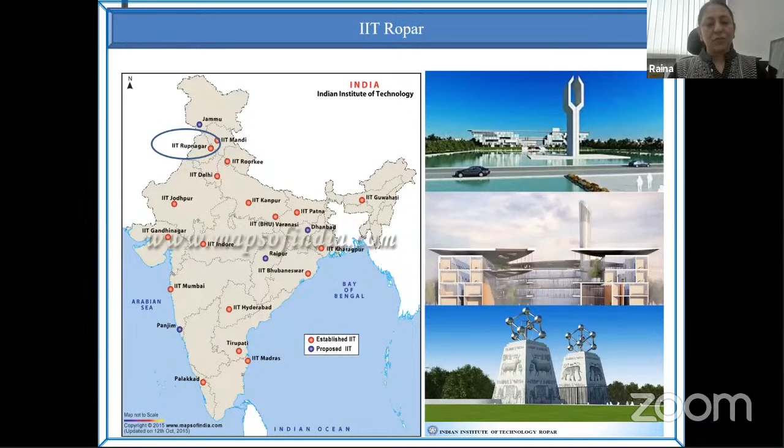Okay, so before moving, just introducing, although you all are from India, you know where IIT Ropar is, but still this is one of the 21 or 22 IITs now. I myself don't count now, but IIT Ropar is well established with all its infrastructure well ready. In fact, whenever after the pandemic you get a chance, it will be wonderful if any of you would like to visit here. This is the department, mechanical department, where presently I'm serving as head, and the entire infrastructure and the labs are wonderfully prepared.

This is just a small glance of my own robotics lab, which I call MOYAR, and this is particularly on modular robotics, and we are trying to inculcate the idea because of the importance of intelligence, right?

We are trying to inculcate the habits of inputting some kind of intelligence in all these types of manipulators. But mainly we work with the modular robots, may it be any field. In particular, I always try to encourage all of us, wherever the platform comes, for Indian robotics, and that is why I had this particular MOU signed long back with Tata Automation Limited, who had started with their Brabo.

In fact, there are more than 10 big firms and many mushrooming firms for robotics in India, and I prefer that all of you should use them in your labs, so that only by uplifting our own companies it will be good. And that is why I also purchased Brabo, rather than only the ABB or KUKA,

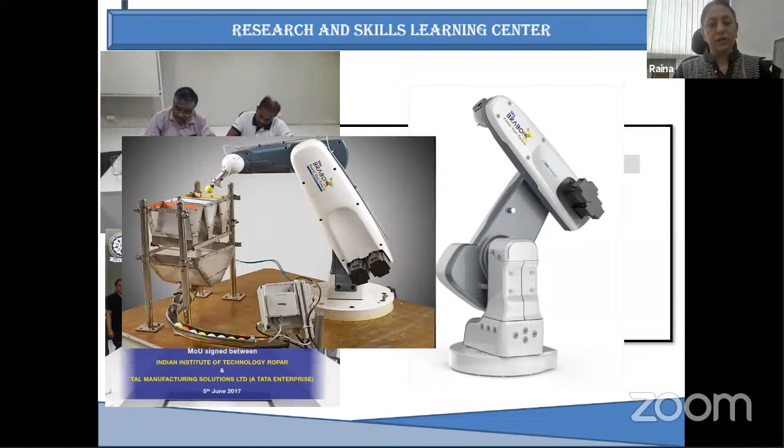where we do not get the opportunity of directly discussing with the manufacturing guys. In Indian robotic industries, it is always better that you can discuss what their problems are, which part they would like to improve. So you can also give some kind of input in the upliftment of Indian robotics. So with Brabo, I had this MOU signed for a teaching skill lab in Ropar. So we are working on it.

And this is just a small introduction regarding my research directions, particularly what I deal with. These are the keywords. Whenever we talk about manipulators, long back people used to say for repetitive work. In the robot definition, one of the terms we use is repetitive tasks. Robotic manipulators are used for repetitive tasks, but these days things are so customized,

when you are working with different platforms, different environments, cluttered workstations. So they're not repetitive, but you will get customized jobs which need not be repeated, which are short term. To improve the flexibility you need to handle non-repetitive tasks. So this is something I work on, and we try to develop these using modular libraries. The rest is just for your information.

Even if I'm working with medical robots or any job with defense, and particularly in industry, which my lecture covers at the end, I always try to see how we can develop a library out of it, how to give it a modular look. So this is how our lab works, and just a few glimpses, small videos, because this is just introducing myself first.

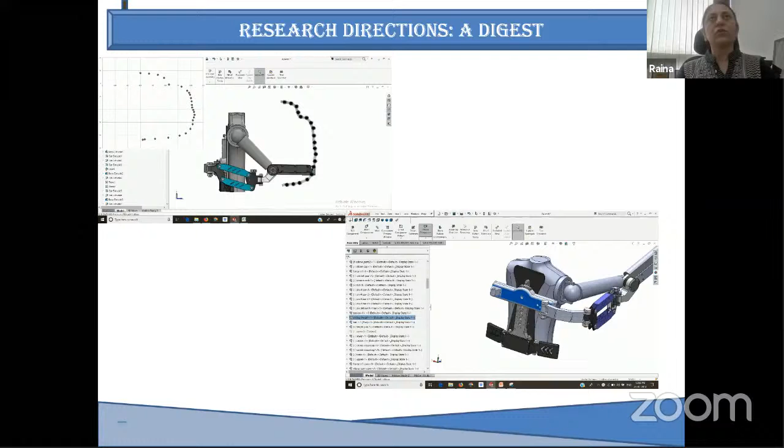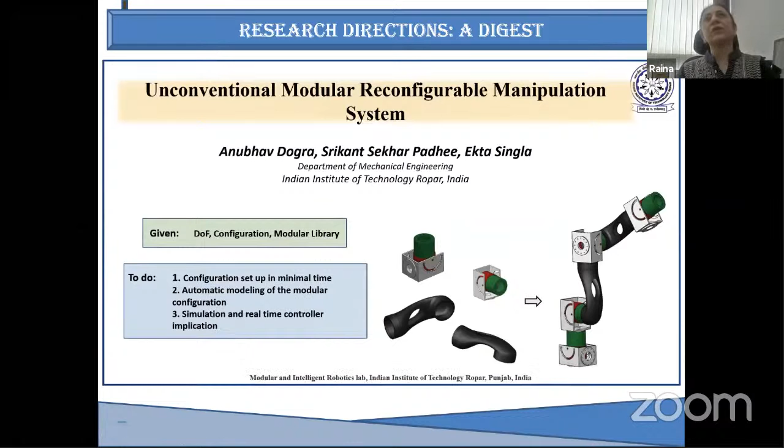So whatever we do, I belong to the optimization design of it, the kinematics of it, kinematic analysis, and particularly up to kinematic design is my job. And then we give it to the dynamics guys. This is just a glimpse, because it is also an introduction to kinematics, and this is my latest work in modular library and how we develop it.

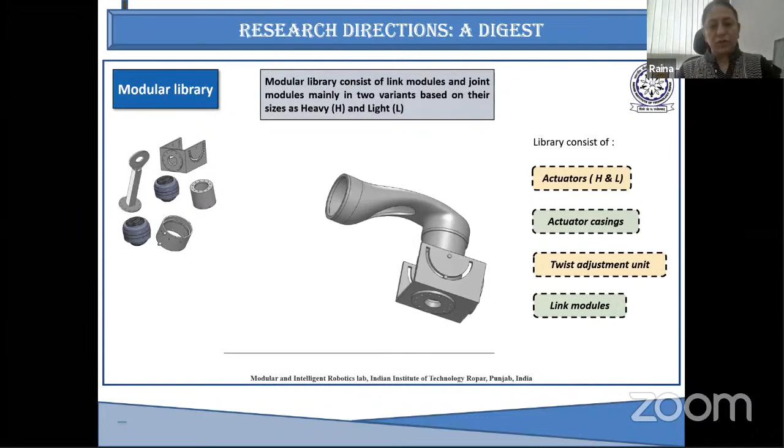And this shows you why we should also learn kinematics, for those who are just starting and for improving their skills. So here you see that whatever robotic arms are available, we need them for customized different tasks. For any given application and given task, which could be small or large, can we have some modules which can be assembled?

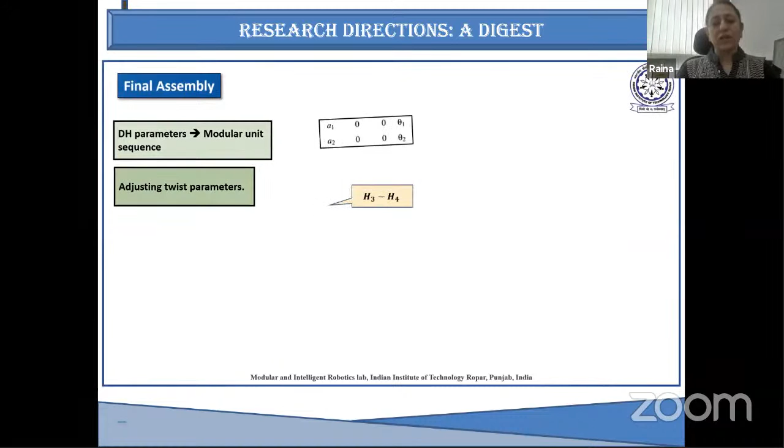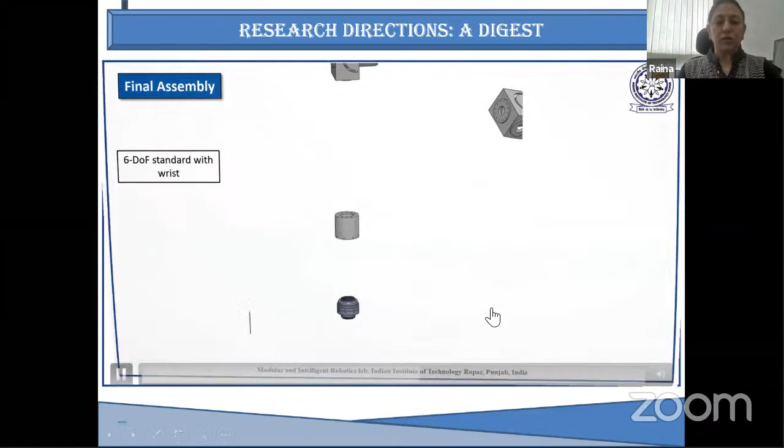So this is our latest work, which has gone into ASME. I thought of at least showing this to you so that you can see how exactly we can work with such modules which can work at different DH parameters. And what DH parameters are, what degrees of freedom are, is exactly what we'll be studying today. Yeah, so this is a kind of manipulation. Of course, it will not be as rigid as our ABBs are. These are just demos.

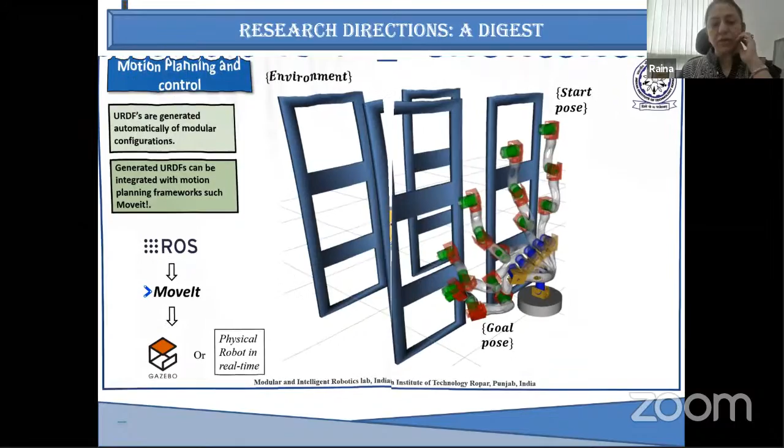But yes, we have done all the static force analysis, and even the dynamic analysis is being done. So this is all prepared. This work is actually in Robot Operating System, ROS. Many of you may know it, or may still not have good hands-on experience, like me. We are using it.

I myself may not have very good hands-on experience, but I encourage the entire lab, my students, to use ROS. So even if you know only the kinematics part, even if you are working only with robot control, whatever your area, may it be mechanical engineering or electronics, it is important that you get introduced to ROS. If you are working with mobile robots, it has a separate platform in ROS. And in case you are working with manipulators, it is separate.

If you are only in motion planning or control, you should use this system. There are further systems also, but you will understand them once you tell yourself that you have to use only ROS from now onwards. Then only you will be more globally ready.

Okay, so introduction, because it was important, as I said, long back. Now these slides will match for a few minutes, kind of 10 minutes, not match exactly. You already got introduced to robotics, and now manipulators only. I'll talk about only robot manipulators, which are mainly the industrial robots, where the links are connected in series, right? And every joint is assumed to be a revolute or a prismatic single degree of freedom joint.

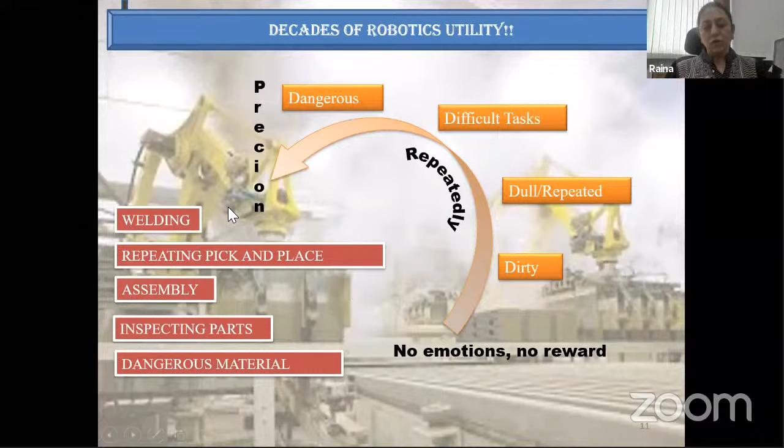Now the point is that you use the same manipulators for different reasons. And what are those reasons? Precision, as I have written, is one. So the entire automotive industry for decades is using robotic manipulators. Even in India, although if you ask globally, relatively we are almost at zero for usage of robots. Although you see them everywhere, if you ask any global person, they may not know anything about Indian robotics.

Yes, for the last half a decade, 1 decade, there was a growth. Half a decade, kind of the last 5 to 6 years, it's emerging very fast. So now we can see huge changes, the way India anyway reacts. Once they understand the importance, it is a revolution. So that is how industries are also speaking about this being a revolution.

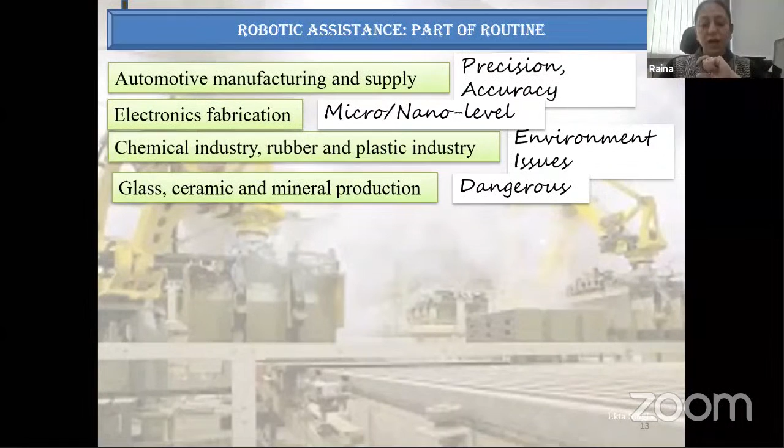So from automotive, although we were using it even earlier, and electronic fabrication, things were coming from large scale to nano scale and micro scale. This is separate. Now there are many other reasons why people are using robotic manipulators, and that is environmental issues and the chemical industry, rubber, plastic. They are very big firms sometimes, but to keep it less dangerous, robotic manipulators are used in all these industries. So why I'm referring to these: if applications are so customized and huge these days, why not learn what exactly is required by the industry if you join them.

And kinematics is extremely important from that perspective, right? Because even if you don't want to design a robot, to run a robot it is important that you know its kinematics. And this is even important because of unconventional designs, as I'm writing for the wood and furniture industry. There was a time when wood and furniture were not using robots. Food had started, for hygienic purposes, etc., and now is the time for wood and furniture.

You can see many YouTube videos of unconventional wooden designs which are prepared using robots. So even if you are using a particular robot given by ABB or KUKA, 6 degrees of freedom or 4 degrees of freedom, without knowing its kinematics you will not be able to work on it. You can work for some time by just playing on its keyboard, but you cannot actually get into the design work, like what particular aesthetics you want on the furniture. You cannot work on any specific application unless you know its kinematics. So that is why I would say it is important.

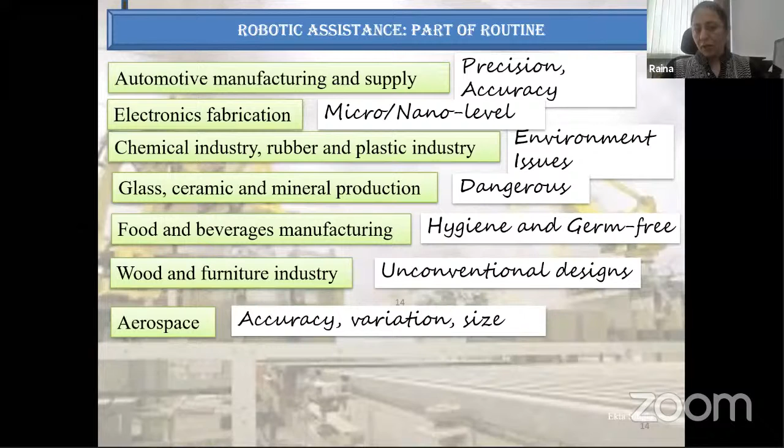And what other applications? Now, I would like to show you a slide where we have major applications which you see in use today for these robots.

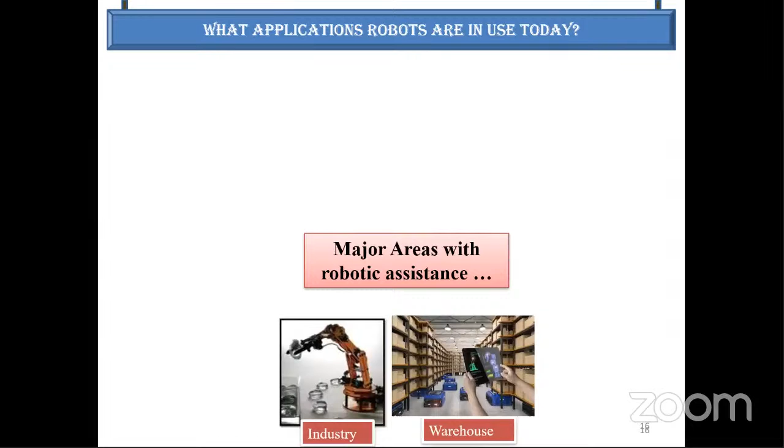Am I audible? Yes, ma'am, you are audible.

So these are kind of mobile robots, but I'll talk about the mobile manipulator, because in all these things, for example, this one in defense, on the left side above, I've shown a picture of a manipulator which is attached to a mobile base, right? So this is also important. You can always consider the mobile system separate. You can do its motion planning separately, and you can do the motion planning of the manipulator, the serial manipulator, separately.

So why I've shown you all these applications, there is a reason, because may it be in service, may it be in agriculture, or even at the right side below, you will see that we have building work being done using assistive devices which have as their major part a manipulator, a serial manipulator. And even in medical, you know that Da Vinci, one of the surgical systems, is imported, right? We have not yet developed in India any system which is already in use for surgery. But yes, there are many at the final stage. As far as the reference is concerned, you might have seen in larger institutes like this, even PGI or Medanta at Delhi, they do have these robotic manipulators.

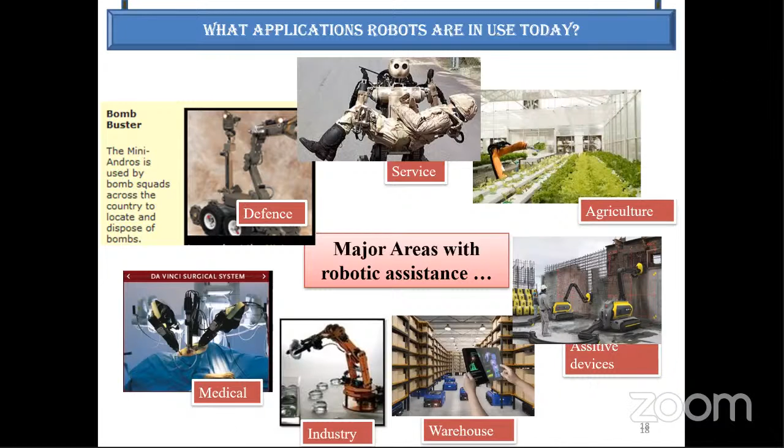Now if we talk about this manipulator at the left side, whose base is not fixed, in the assistive devices of this building or in defense, these examples show as if the base is also moving. Yes, it can be, but then we say it is not a manipulator, we call it a mobile manipulator, because it has a mobile base which you can study as a mobile robot. And for the manipulator, you can always consider its base to be fixed as the reference on that particular mobile platform, and then work on the rest of the degrees of freedom. So how to do all these things, what does that mean? This is what we'll be discussing today.

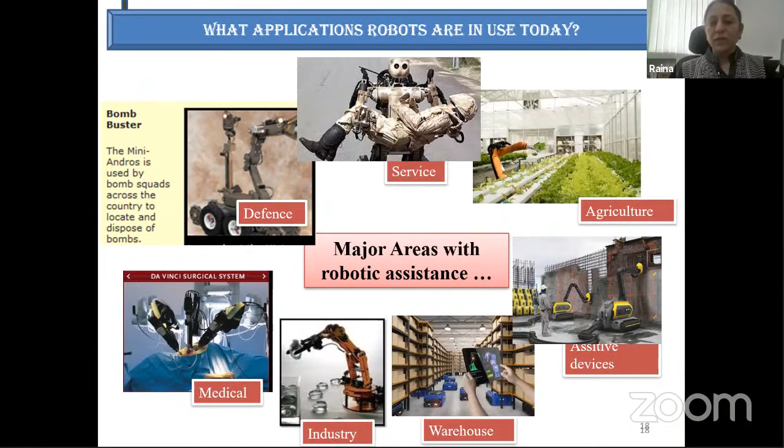Okay, so basically, this was the introduction to robotic manipulators. If we are talking about kinematics, there are a few terms, aspects and features of robotic specifications which come into our discussion. So I took a few examples of very advanced recent robotic manipulators which are in use for different applications. Normally in these courses not everybody is from the same field. People are from mechanical, electronics, computer science, and some are teachers at the beginner stage of their teaching. Because of such an audience, I prefer to share this. The first important specification whenever we deal with any robotic arm is degrees of freedom.

So we will write the kinematics. What is kinematics? I'm coming to that later. And these are the important specifications. Now, what are those? For any given robotic arm, this is now a manipulator, and I'll talk about manipulators in this particular hour. So how many degrees of freedom, and what does it mean? It is the minimum number of independent parameters which can define the motion or configuration of a particular robotic manipulator. So you need some minimum number of independent parameters; as this robot starts moving, these parameters define at what configuration or posture it is at present.

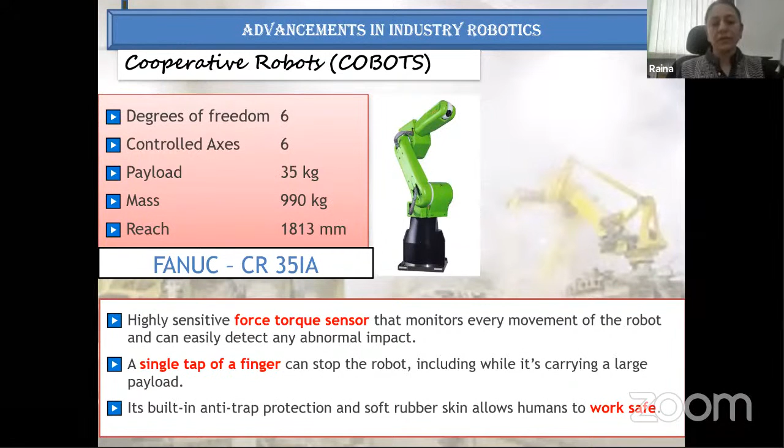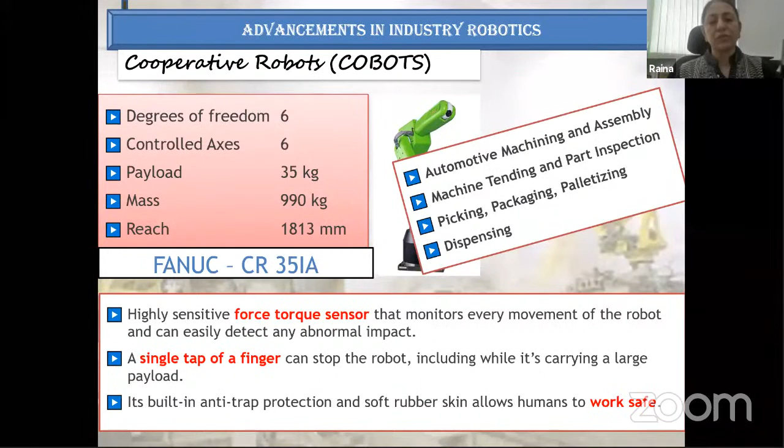be enough. But I would say that before talking about which actuator will be used, we have to think about the size according to the requirement, and size comes from the kinematics, because what length, what angle, what size of a particular manipulator, even the width, all comes from kinematics. So next, I'm not getting into the applications of such small size; I'm just writing them for you to read later.

Third application, this is a mobile manipulator, right? If you check this part, if I take it separately, right? Then for the upper manipulator, it is mentioned as 5 degrees of freedom, and you can see one, second, third, fourth, and five. So it is talking about the 5 degrees of freedom of the manipulator. The 2 extra degrees are for moving; even if it has only one actuator, it can go in the plane, so it can take turns, right? It will be maximum 2 for working in this plane. So that will be added.

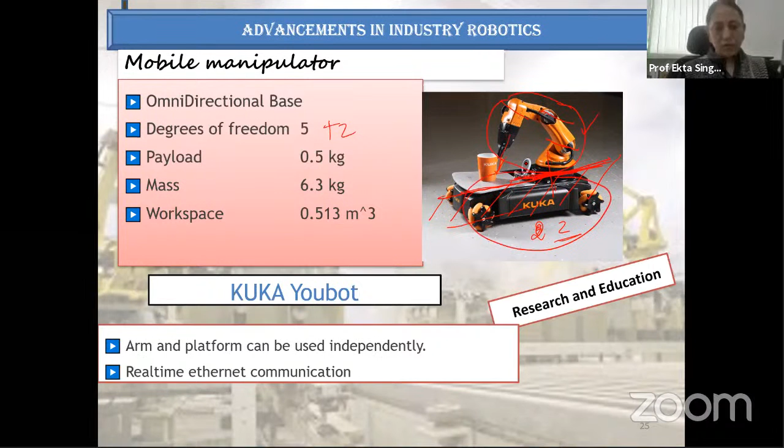But only for the manipulator, when you study how to write the kinematics of a manipulator and I give you this particular robot, you can always take this section out, work on the manipulator separately, and work on the mobile base separately, right? Whatever is the requirement, accordingly we can work. This is all just to introduce you to some of the recently coming configurations, so that you get connected to what is getting used in recent industry robots.

This one is only for paint, right? If it is only for paint, that means only what position it is in. Why I'm showing it is it's high performance, but what is the performance? The dynamics, like which velocity, can I reach here, what torques are required, and then how to control it to maintain that speed. This is coming to dynamics and control. But as far as kinematics is concerned, if you want to paint, and this is your present configuration, next is say this, right? After some time, say it is this.

Then after some time you want it to be something different, right? So where you have picked up this gripper or the tool which will be used for that industrial application, how it is connected to the base, how to show that equation, the relation between this end effector xyz orientation and this frame which is attached somewhere at the base, right?

How to connect all these things, because we have so many degrees of freedom, plus the importance of the degrees of freedom will boil down to a particular equation which we will call the kinematic model. We are coming to that. But this is all to show you that different manipulators have in common the same configuration. Everything is having a serial link, a joint, a link and a joint.

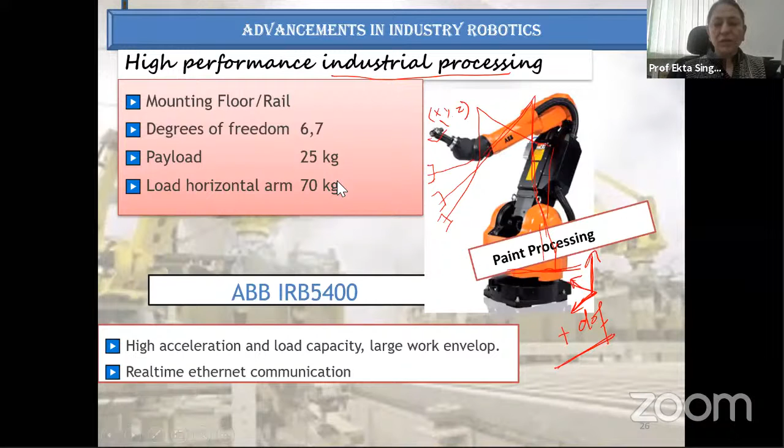So although its payload capacity is 25 kg, here you will find that with almost similar kg, its own weight is not mentioned, but I think next it is mentioned. Anyway, I'll just show you this quick picture, which is also a collection, because I like this video. Of course, it is from ABB, and it is talking about...

I don't know if you are getting the voice. Well, it is not so important. Yes, come.

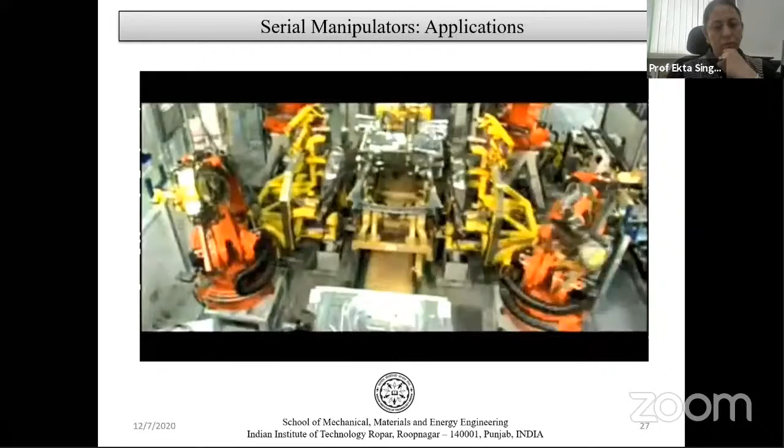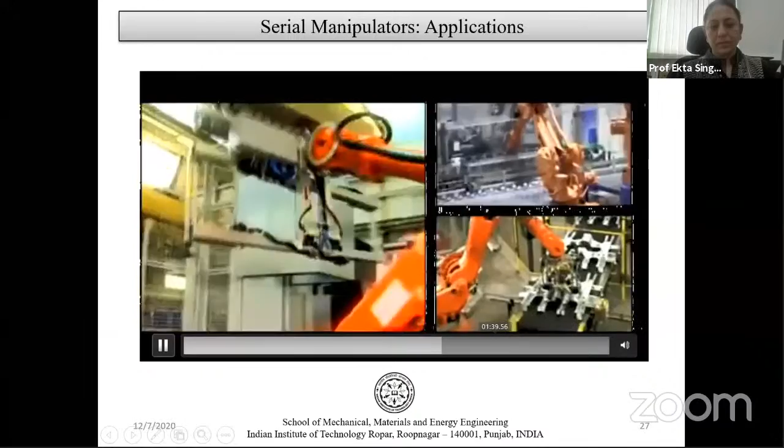Okay, so basically why I showed you this is, this was all about the introduction, not only to robotic manipulators, but also to the importance of robotics and to the introduction of kinematics. This last video was added to tell you that it's the same manipulator, one which is serial in nature, right? Say it has 6 degrees of freedom, and you will see that the skilled workers, once they know how to use it, will start using it.

But unless they know the kinematics, because not everybody can actually study it. But engineers help them whenever you need to plan them again for a new application; you need to know what its degrees of freedom are. Till the last decade, people have taken robotic things for their help in their industry, but they have no clue of the models at the back, and this is why they're always dependent upon the firms, even to plan whenever they are working on a new application.

So do you think this is applicable? If you are working with customized robots, the flexibility is too high, you're changing the application every fifth week, then how can you be relying upon the firm to plan for you? So more and more engineers are being hired these days. Even in India, robotic firms have increased, and even if it is not the development, the employment is getting high. So people should study robotics.

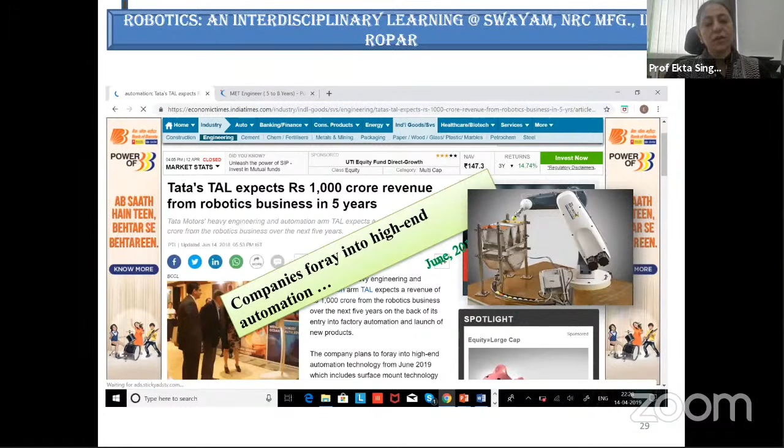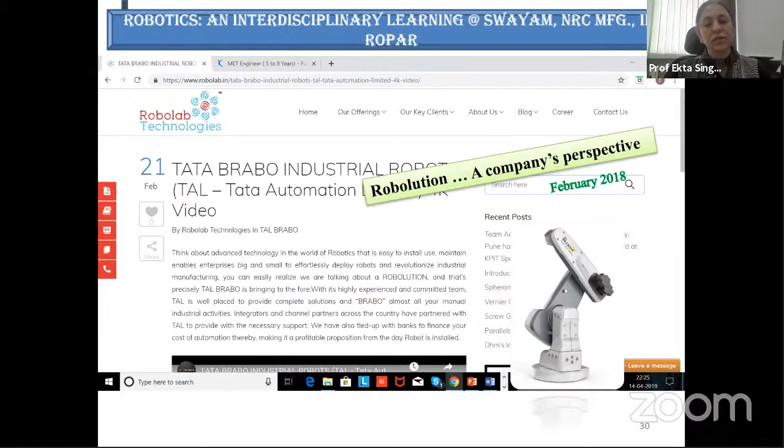I am not here to just talk about this agency, but similarly, as I said, these are just a few news, and they are not only for autonomous vehicles. They started this company as an enthusiast who wanted to work in robotics, but this firm is really big. You can see how the bigger firms are coming up. Upcoming businesses are too large, and this is why your learning in robotics courses is extremely important for your knowledge and for you to tell your students about it.

As far as humanoid robots, I'm talking about the boom of robotic startups, because these days there is a boom, mushrooming companies, but you never know which company will really come out big or small, but everybody will contribute, this I'm sure. For the time being, those who would like to get into robotics in a proper way and sustain themselves for a few years, that will really be good. I would say from both perspectives, the Indian robotics industry in total and for the firm itself.

Okay, so this was all about the importance. Now let us come to the fundamentals and the techniques, because what are robotics? Before getting into robot kinematics, these are a few terms which we normally use, and they come from, I'm not sure if all sitting here with me are mechanical engineers.

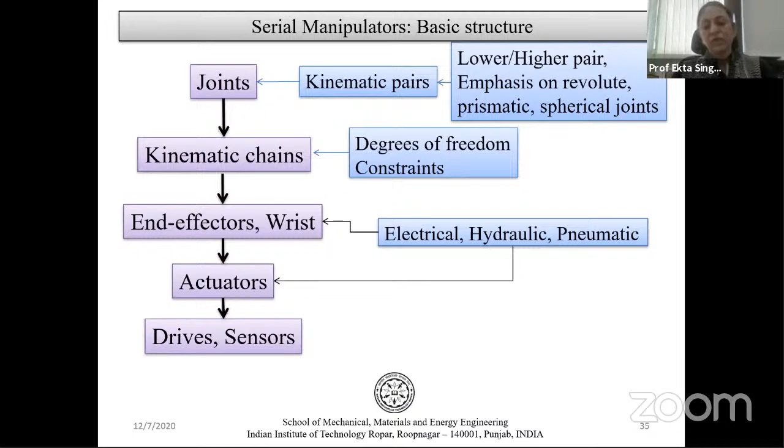And end effectors, I've already spoken about this. This is actually the tool or any gripper or the particular component which is attached at the end of the serial linkage of the kinematic chain, which will be used for the particular application. So this is what you would call an end effector. And then of course it will be using some actuators and drives, that is separate. These are just for introducing some of the terms.

And yes, now from here, I would like to use a little bit of pen writing also, because it's important that we talk about linkage. We said, okay, I'll just fold.

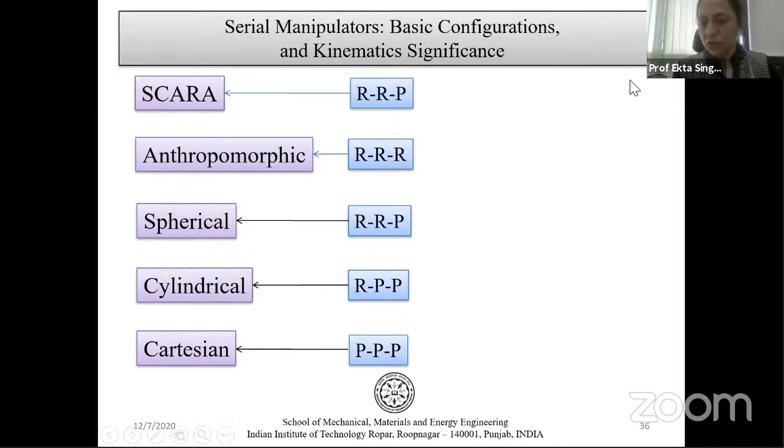So we were talking about a particular linkage. This is the base. Now, whatever I have introduced till now, I am using it: fixed base, a link, a joint, another link, another joint - and this joint, to show you, is a revolute joint. This is another revolute joint. Now I show you a joint which is prismatic, which means to and fro, like your piston - this is like the hinges. And then after that, we have nothing but a gripper, or the end effector.

Now, even if this is not a plane, it can be shown that this is planar. But the moment I change its shape, the first is fixed, but it can rotate like this, its axis is this. And here the axis was this, and this was fixed.

This was fixed, and this is the Z. So there's a difference now, but this is also similar. This is rotating, and after that we have something that has just taken a shape like this. This entire link is rotating about this Z. After that you have another link which can rotate like this, and this particular one is P, so this is also R and P.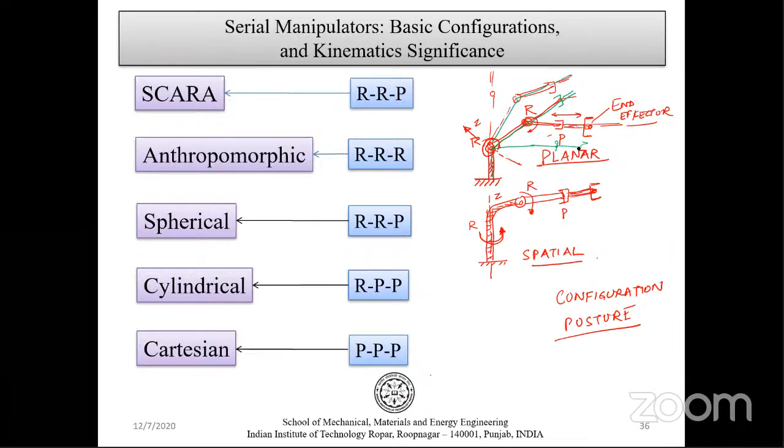So we are talking about configuration as one word, and posture as another. Whenever we are talking about posture, I'm talking about these different postures. Like this is one posture, second is in which I have changed it. Then this is another posture, or it can come here like this. Similarly, this will change, it will go at the back. It can go even at the side because it is rotatable.

It can come at this side and the rest part can remain. This is just the same linkage and this is one gripper. So these are different postures, but as far as this one and second, these are called configurations. That means these are basic configurations.

To introduce that, coming from the basic terms, even if something has 3 degrees of freedom, both had 3 degrees of freedom. It has, even this had 2 revolute and one prismatic joint. Even this had 2 revolute and one prismatic joint, but both are 3 degrees of freedom, both have their configurations separate. And these configurations, some of them are very well known, called standards, which one should study in the beginning.

I used those only, and simultaneously at the right side using our writing I will tell you all the fundamentals. So here the takeaway is this: what is configuration and the postures, which means when you are changing any degree, you get a new posture, because the degrees of freedom help us to define the position

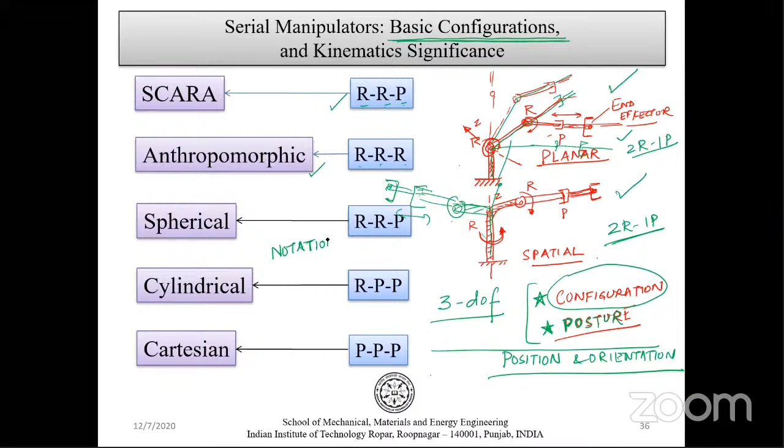But in a particular plane, if you are working for an arm, you can say it has RRR, like all three revolute joints, one at your wrist, one at your elbow, and one at your shoulder. So you can say it is like an anthropomorphic configuration, spherical. Rather than speaking it here, this was just to show you how to denote, how the notations are being used.

So basically next, this is one example. From here, configurations are being shown to you, but simultaneously we will take care of some kinematics importance. Now what can it do: up and down, left, right, in, out. There are 3 degrees of freedom.

Okay, 3 degrees of freedom. Specifications should be very sure about what we are doing for its kinematics. What are the types of joints, which means PPP. Now these are all prismatic joints, and this is the gripper. Now what is kinematics, I'll introduce it here. So if you tell me, taking any example, what do we mean by kinematic model?

Why should I study it? We need to study it because we would like to have a relation between the end effector, which is this, in this case position and orientation, and the base or a reference frame, with respect to reference. You can simply write that. That means something here.

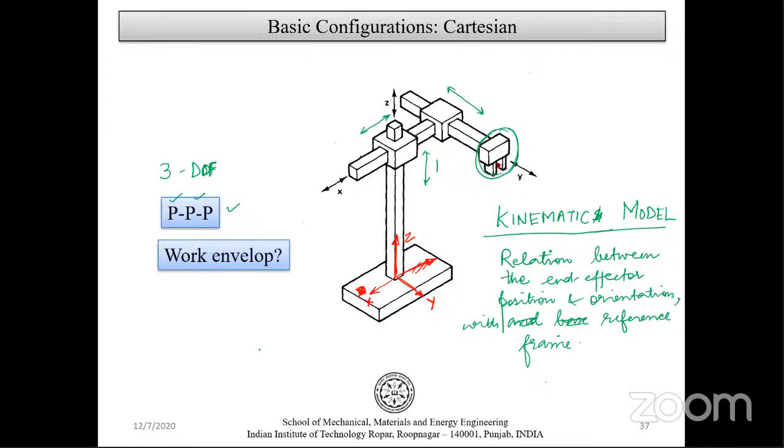You need a reference point even at the gripper. Now, how to tell what is the position vector of this particular point? After some time, if you say this is my first degree of freedom, this is second, and this is third. D1, D2 is the movement here, and D3 is the movement here. So I'll denote the prismatic movements as D and revolute, whenever there is a rotation, as theta.

So if it is so, that means we have here D1 as a parameter, D2 is another parameter, and D3, which are variables, and if they are changing, the configuration or the posture will change, right? So this is to connect whatever we have done till now.

So if it is so, you understand that if I change the posture, even if only D1 changes, or D2 or D3, this point which is mentioned here, I call it as P, the last point for the end effector, right? If it is so, then the position will be defined based upon D1, D2 and D3.

That is all right. Now, even to show this, because the orientation cannot change unless you rotate it, right? But this orientation is fixed in this case. And normally in the 3 degrees of freedom manipulators, they are used for positioning. The configurations are different, but normally they are used for positioning.

But in totality, the relation of this end effector position or even orientation, if it is available with the reference frame, how to connect this, how to join this. Now, in this case, it is very simple.

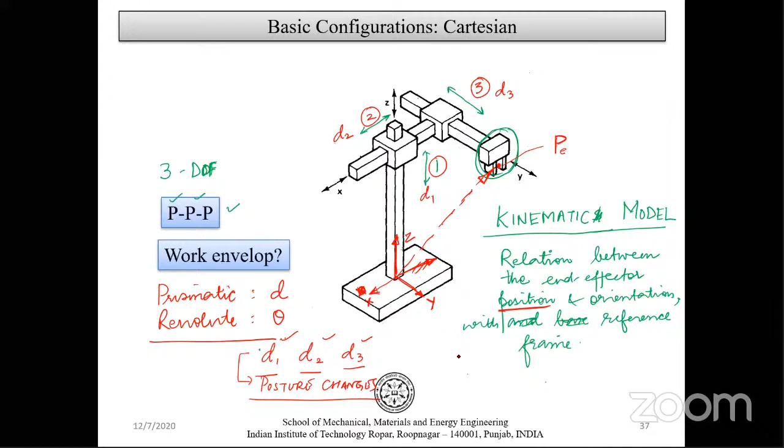You will say, we know that in x direction, the movement is, say this is zero here and it is D2. So you can always write this vector according to my frame. In x, I can look at this and try even now. And it's very clear, we do not need anything very complicated here, right? You can always see that if this is zero here and the movement is only from here, movement is here, and movement above is from here.

Looking at the references, I can always see that D1, D2 denotes my x, D1 is for z, right, D3. So we can say in z, in my x direction, which I'm now working with in blue, it will be positive in that direction minus D2 if it is moving in that direction, right? And in y, the second component is for y, so y is how much I'm coming here.

So actually, this is not mentioned according to x, y, z. The value is what I've shown as D3 as positive, and z is how much I'm going up. This is the way I've defined, because reference frame can be defined either way. If you change the reference frame in a different format, of course your values will be different, but this is how we can always show that this vector can be defined.

It is very clear. So that means we have got to know the position vector in the form of, you can always write it as D2x plus D3y plus... I mean using i, j and k if not x, right? This is so straightforward, in fact you do not need anything which is required to be detailed. But this was just to tell you the introduction of kinematic model. That is the takeaway for this slide.

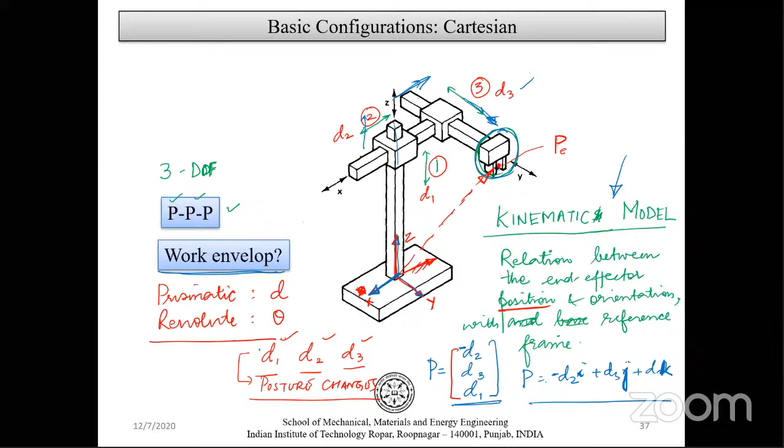So if I ask you what will be the shape of the work envelope which will be formed if you can change all the d1s, d2s and d3s, because it can go here up, all these directions. If I just change the color here, then here up and down it can go, left and right, but depending on the constraints, it will reach maybe more in this direction and less at the back, more in this direction, less at the back, more up and less down.

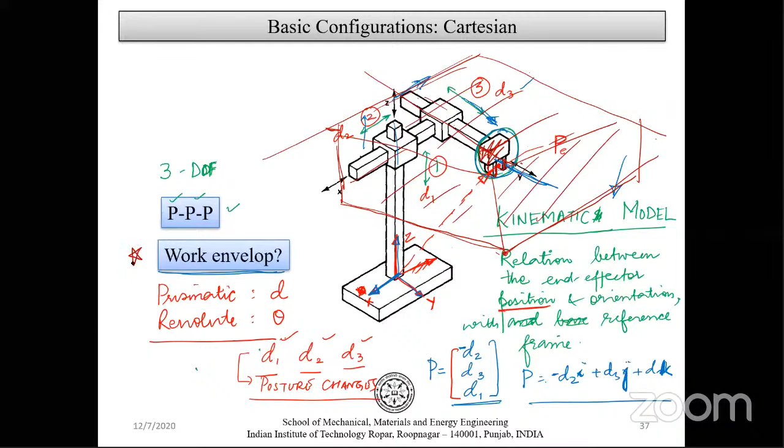I'm not getting into the details, but yes, this will be the work envelope where this particular point, which is the end effector, can reach and work, right? It will certainly be smaller than that and it may be hollow in between, but that depends. It need not be hollow, but at least it has constraints. It may not be able to go lower than this or higher. So that depends upon the limits. And this will be the approximate shape of the work envelope. So this is the takeaway for work envelope and about the kinematic model.

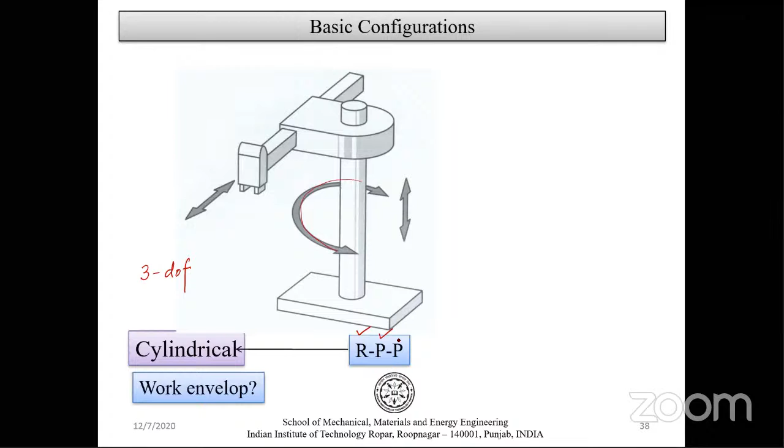So next, taking one more example on the configurations. Now for this configuration, we come back to the degrees of freedom. Again, 3, because 3 parameters will be required. The first joint is revolute. Now as we can see here, prismatic and prismatic. And here, this is P, revolute and prismatic.

Okay. And this is one of the basic configurations, called the cylindrical configuration, right? In fact, the previous one is sometimes called cuboid or box, because of its work envelope. And here, as the name suggests, its work envelope will be a cylindrical form, not really a complete cylinder, but it depends upon the limits of these particular joints. Okay, so what next? We have already understood what a kinematic model is.

So without getting into any specific technique, if I try to write where this particular point will be positioned with respect to a given frame here at the base. The base is always fixed; this is what we have learned about manipulators. This is fixed, this is X, Y, and say this is Z. Now, if I want to define this particular point, how would you go about it? Say this vector, right? Would you be able to write it? Can you write the X, Y, Z of this point P?

This is a spatial manipulator. Again, 3 degrees of freedom, spatial. I'm using all the terms so that at least there should be some takeaway today. All these things help you to take the full course. It's very easy, it suits you, and you should study a full course on robotics.

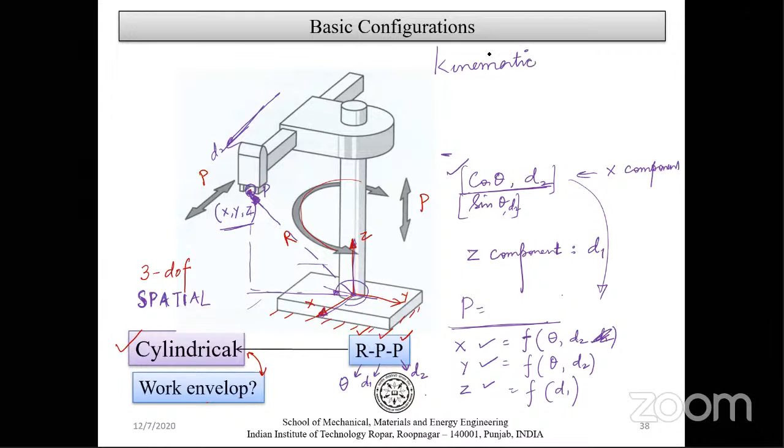So what is a kinematic model? Kinematic model is your function, how you are connecting the set of functions, or you can say a vector valued function of your either theta or d. We call it as generalized coordinates. This is your kinematic model, and you connect it with x. So this is what you study in your books, because we cannot every time tell, this is a theta, this is d and all. You'll always say there are 3 degrees of freedom. So there is a vector. This is the takeaway now. Q is my generalized coordinates.

What do we mean by generalized? Means it can be any units. In a simple way, I'm telling you, because we studied in multi-body dynamics. But given any units, now any parameter from any domain, if that is being used as a coordinate to define the configuration at the last, then that will be general in nature, and we call it as q. So q can be theta, it can be d, right? It can be theta or d, but how many number it will be? The number will be number of degrees of freedom, right? And that means number of coordinates. So that will be its order.

So q will be having, in this case, it will be a function of q1, q2, and q3. There are 3 degrees of freedom. Of course, your first is theta, second is d1, and third is d2. That is separate. So how to write it? That means you will get a model, and what is x here? Capital X, right? Or you can say a bold X, the vector. So these are vectors now. This is a vector valued function. That means a set of functions.

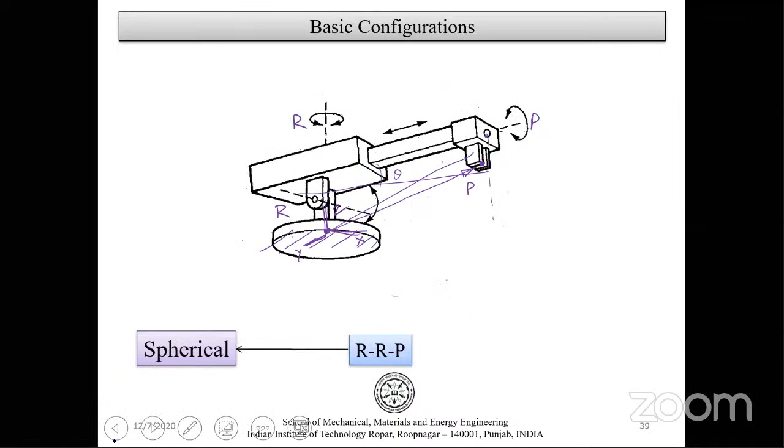Now every time you cannot work on, because these things are very straightforward. You can always see what is theta here, and what is this much distance, what is the different distance, and you can always write the function X, function of theta, because here also it will be theta 1, theta 2, and D. Now you agree, because function of Q1, Q2 both are thetas, and Q3 is actually a prismatic joint, depend upon this, right? So first will be a theta 1, second is theta 2, and third is this D. We call it as D3 because it is at the third location sometimes. This is just the name.

So I think so far I have tried in some less time to tell you what is going on, what we are trying to compute, so that even if you get little less about how to compute, that is there in the books, but why to study and how easy it is, that is what I try to show you in the different configurations.

So each point at the end effector, say this is your point, and how it is connected to some frame here, that will be shown through theta 1, theta 2 and theta 3. So this was all about the fundamentals. Now going ahead, number of degrees of freedom. This is the SCARA robot. It has 4 degrees of freedom. So as it is said, now it is being added. The moment it is being added, it is very different.

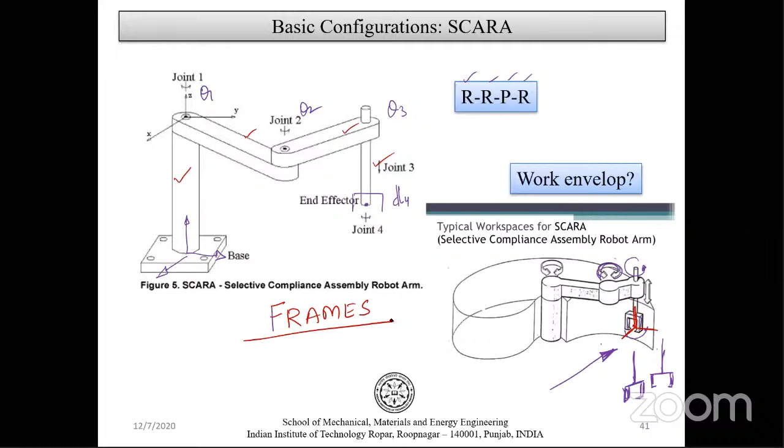Frames means how this last frame can be defined with respect to the base frame. So I will make different frames for you. This is a reference; this will be fixed base. Second is for this. Third, you will join here. Fourth, say first link I'm taking here, second here, third here, and fourth here. That depends. There is a specific way you study in robotics, how to affix frames. So I'm writing it here: how to affix frames. Study about it. But even if you take them arbitrarily, it is okay.

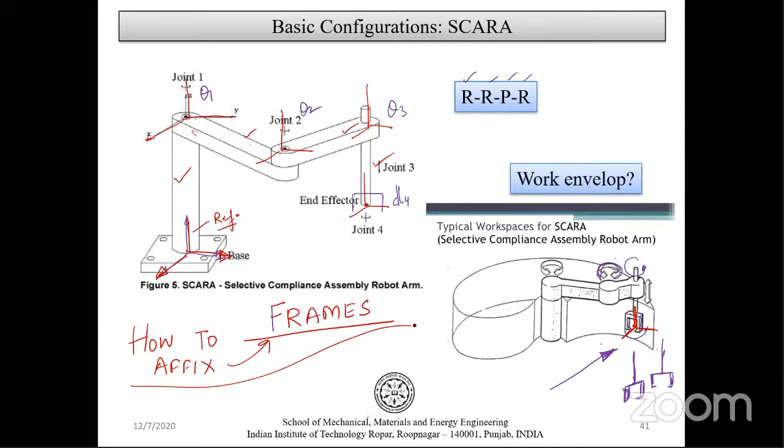We do not take them arbitrarily, and there comes the importance of my last 25 minutes, and that is DH parameters, which is the technique. In fact, there are people globally saying, no, I don't want to use DH parameters. But I must say that in the beginning, when you are studying it, for a majority of tasks DH parameters are useful because they're applicable in all types of these configurations. And even if you're not working with robotic manipulators, they are very helpful in any multi-body system, even in automobiles.

So what are those? To come to that, the importance is about these frames. So it was easy for me to fix a frame here, and then within the frames, with respect to each other, can I define rather than a point, because a point I could have defined only by a position vector like this.

But do you know, I'm writing a big question here: how to define orientation, right? How to define orientation. So orientation, I mean, frames are fixed. Why? So that we can define orientation.

Because orientation can be defined by, I'm sure you know, the three angles. One possibility, for example, is using your Euler angles. I'm not getting into details of it, but just connecting, because particularly people from mechanical engineering know, and even otherwise, in a ship when it is rotating, we talk about that it is rolling, or its pitch is changing, right? Or it has different yaw.

So roll, pitch, yaw you might have heard of, or in gyroscopic you might have heard of, like, okay, it has a spin, it has a nutation, right? So all these words are actually for the Euler angles, which means three angles. We call them alpha, beta, gamma, just for you to quickly understand how much about x, y, and z you are rotating, so that this frame has this x, this y, and this z.

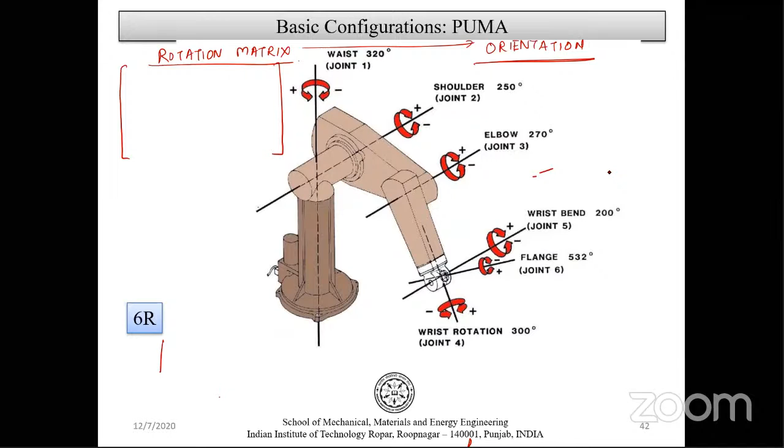You know, matrices are not used as operators only, they are also used to represent orientation. It's not that you always need three angles to represent orientation. The rotation matrix helps us there. And how? Using the cosines, you will say x of end effector, x of end effector.

Okay, one second. Hello. It has closed, maybe. One second. One second. Is it being shared again? Yes, ma'am. Okay, so we have the last 15 to 20 minutes. I'll just write again, because that is discarded. I wanted to share it with you. By mistake, I discarded it. Anyway, this video will be shared.

So basically, I was talking about the importance of the rotation matrix, which is helping us for two things. One, as an operator, which you might have seen many times, because if you want to rotate anything by theta in transformations, we know that there are specific matrices which can be used for that. But I'll show it there. And second is for representing the orientation.

I'm connecting it to our present understanding of what a kinematic model is, in which you are connecting the position and orientation of the end effector with respect to the reference frame. For example, this is 6 degrees of freedom.

Another extremely useful industrial configuration, right? The Puma. So Puma is actually about the configuration because it has 6 standard joints, all R, 6R as it has been written. Now, how to define this point? Whatever you try hard, it will be very difficult to use just the geometry and write the position and orientation of this particular last link, right?

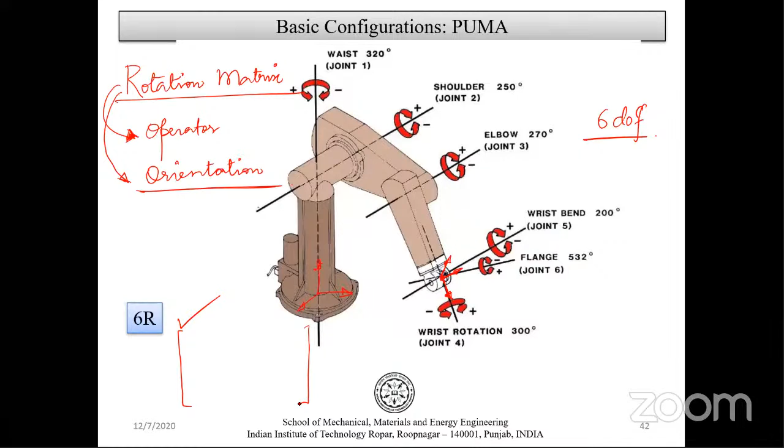For example, this is my orientation of this, and this is my fixed frame here. So in the last, I could have used the direction cosines. It's easier, but for that you need the cosine angles between the two vectors, that is the dot product, and that is what I was writing. Orientation using direction cosines is one of the methods, at least one method to make you understand how the orientation is being defined.

So we have x of end effector, y of end effector, and z of end effector. Here, I'm just changing because there's so much red here. So this is my x, y, and z of the end effector. Last one, that means the sixth, right? So this is my z then, and this is y approximately. So these E are depicting the end effector's frame, and the reference frame is this x, y, and z without any subscript.

So basically, we have to see how the two are connected. If I try to write a rotation matrix defining the orientation of the end effector with respect to fixed, then it can be written directly using direction cosines: xe dot x, xe with y, xe with z, dot products. Then ye with x, ye with y, and ye with z. Then ze with x, ze with y, and ze with z. This is what I was doing in the last.

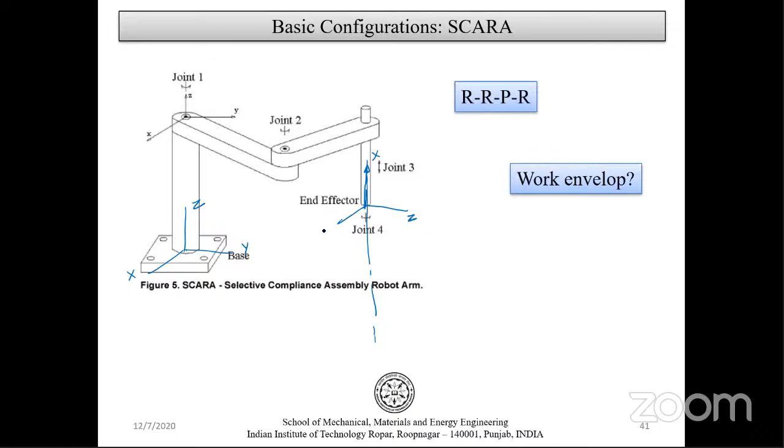Looking at the last picture, those have gone, but I can write directly. So in case I have to write this vector and this vector, this is my x, y, and z. In the other case, the z I would like to take here, although I will not, because the joint is this axis, I'll take the z again in the same direction, right? But still, in case I take this as z, this is x, and this is my y. Say the frame for the end effector is this.

Then can I write using the direction cosines the rotation of the end effector with respect to previous? Yes, you can define the orientation of the last frame with respect to your base using the direction cosines, xe with x. It is exactly 90, that is why it will be 0. And then xe with y is 0 and xe with z is 1, right? Because we consider these as unit vectors.

Similarly, if I write for the y, the second column you will find will be this. And the third column, which is actually aligning with z, right? I purposely do it so that I can write fast for you. It will be this. So quickly you can write using the direction cosines, as I've shown you the formula, the orientation of a particular frame with respect to another.

So in totality, you would like to know in the kinematic model how to write my x, and this orientation can also be converted to alpha, beta, gamma, the Euler angles. These parts are done separately; I'm not showing you now because it would be huge for one lecture, but I'm connecting you to the things which will be used. The orientation can be represented using a matrix or using these three angles, and the two are interchangeable. You can convert from angle representation to matrix, or matrix to angle.

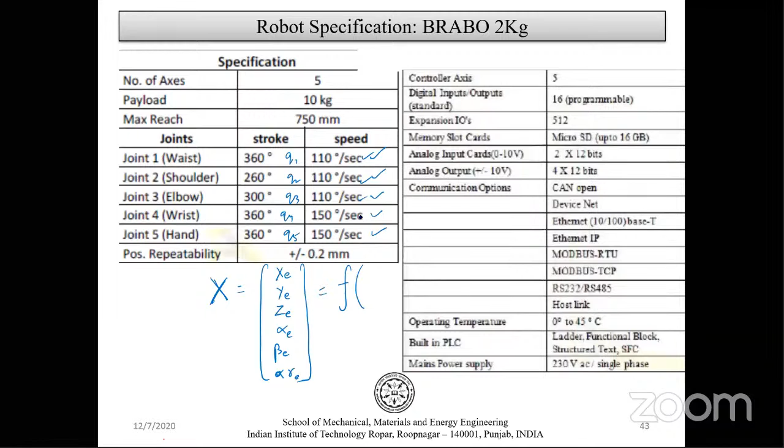Whenever you are working practically, purchasing a robot, these will be the basic specifications, and you will be working on the degrees of freedom. Repeatability and other things are separate, but related to kinematics, for example this is for the BRABO with 5 degrees of freedom: first, second, third, fourth, fifth. So this gives Q1, Q2, Q3, Q4, these are the known ranges, and speed ranges with maximums. These specification cards are straightforward to understand, and you have a function of Q which connects to your X.

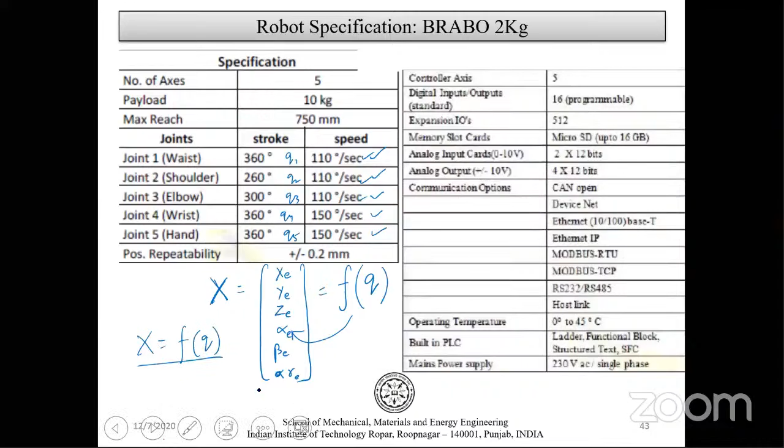Now finally I'll show you one important slide where the importance of DH parameters comes into picture. I showed a specification, and even if it has 6 degrees of freedom, or a SCARA which has 4, it is not easy to use the geometry to write its model. So what do we do? The idea is we have DH conventions, and I'll quickly show you how easy it is. What it does, I'll tell first.

This case study I've taken from some books. I'm connecting you not only to specifications and textbooks, but to any research papers working on the kinematics of a robotic arm - they will normally talk about DH parameters or transformations. So those interested in this direction must pay attention to transformations, Euler angles, orientation representations, direction cosines - I've already talked about the importance of these - and finally the Denavit-Hartenberg parameters.

That's the full name, from two scientists. I showed this example first so you know what we're talking about: it will be a tabular form with A, alpha, D, and theta - 1, 2, 3 rows in this case. What are these? They're according to the degrees of freedom. This was a DH parameter table for 3 degrees of freedom, for the robot shown here.

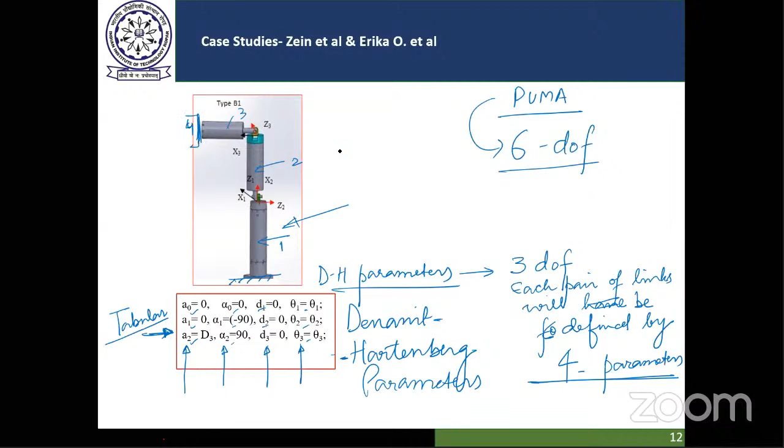In that, every pair of links will be defined through 4 parameters. Each pair - that means from link 0 to link 1, link 1 to link 2, link 2 to link 3, and link 3 to a virtual link 4. So 0 to 1 is a pair, then 1 to 2, 2 to 3, and 3 to 4. The 4th is virtual and 0 is my fixed link.

This is the end of it. I think I've tried to connect all the terms, particularly for beginners. From all this, you'll find you can connect 4 parameters each, and in total you get 16 parameters for this: A, alpha, D, and theta.

Now the only thing left for today's lecture is what are those 4 parameters, and why these 4? What does that mean, what is happening? Basically what it does is go stepwise, defining a particular reference frame at the base. It connects that to the frame at the first link. Then the 4 parameters are used to connect that transformation with the second link.

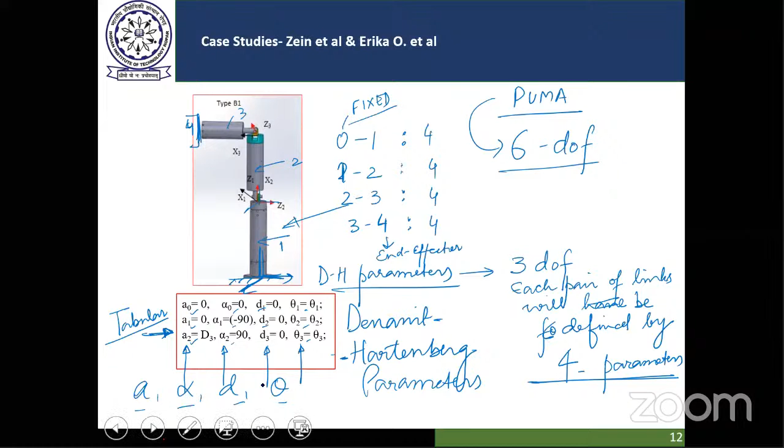If you have 3 links, every link will have this collectively with the next - I'm not showing this now, just quickly to show you there are unconventional values also. Even for Raven 2 or Da Vinci robot, if you are working in medical robotics lines, the same knowledge of DH parameters or kinematic model will be used.

And for Raven 2, you do not have the 0 and 90 - the alpha angles will be even non-conventional. But I'm not asking you to learn this now. This was just to tell you the importance, that once you know how to write them, then it's just a matter of frames, as has been shown here.

Finally, the DH conventions - here you will find what these are. If we are talking about each pair of links, not 0-1, 1-2, I'll take i minus 1 and i, where i goes from 1 till n. N is, as I said, the number of degrees of freedom.

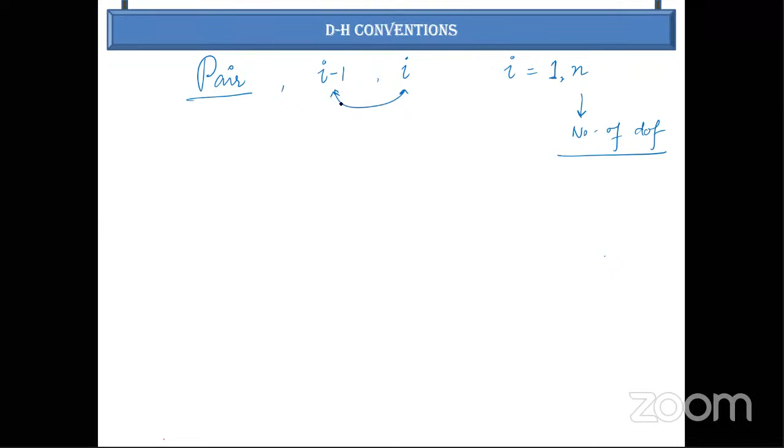So basically, between the two, if I get four parameters, what these four parameters will actually do is help us denote the ith frame with respect to the i-minus-1th frame.

In totality, if you know the pairwise pair, then you can work with multiple bodies. That's the gist of multi-body systems.

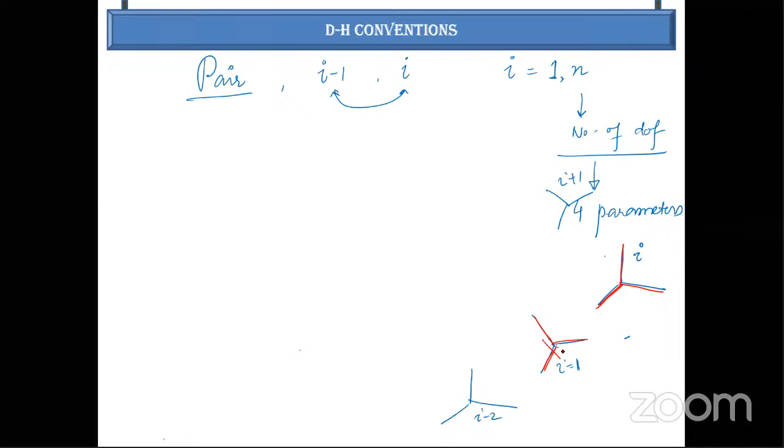Wherever you are, this is i-minus-2, this is i-plus-1, and I'm taking just out of that one pair, say this, i-minus-1 and i, which means this is the pair connected with, this is one, this is second, two joints, and there are further joints, right? Further joints, and say these are joined with some link. So I'll take this particular part and show in front of you what is the meaning of these four parameters.

Once we have those four parameters, there is a standard matrix in which you can put them, and that matrix will give you the matrix of transformation of i with respect to i-minus-1, not only rotation but even its position. Only that matrix will be used directly to define your ith frame with respect to the i-minus-1th frame. How to write it? How to get those?

So here is the extended view of what we have shown for the multi-body systems. Say this is my link connecting to this, this is the i-minus-1th link, this is the i-minus-1th joint, and this is the ith joint. Now I told you what is the meaning of all these joints. Joints are coming from 1 to n, and the links are also 1 to n. So you will see that these are the joints.

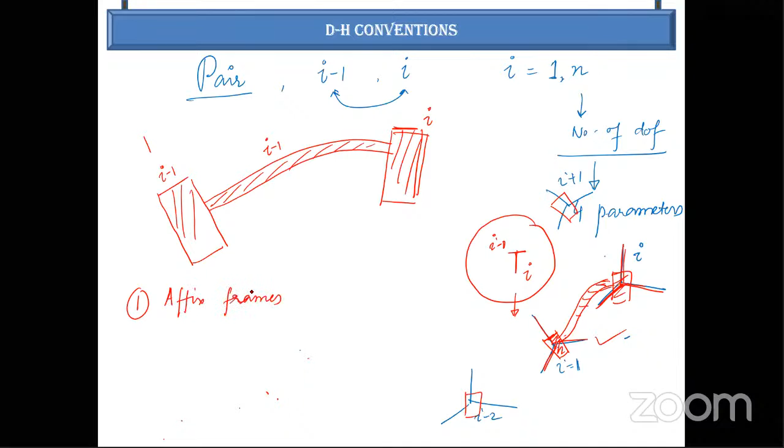So the first thing is, there are only three steps. First is affix frames. It's not that you fix the frame in any direction and then the DH parameters will work. No, this will work only when you have fixed the frames according to DH conventions. How is it fixed? Very easy.

I want to change the color. Very easy: first I will take the Z's, the X's. Take all the Z's, like not only for i-minus-1 and i, but for any axis, 0, 1, 2, 3. Just draw the long lines, okay. Then take, between the two axes, say this is my Z i-minus-1 and this is Z i. Just draw all the axes, and then out of those all axes, you take this particular common perpendicular.

And you know what? These common perpendiculars, if I just go back one minute only, this common perpendicular in skew lines will be visible, but in intersecting lines the common perpendicular, of course, has value 0. It will be the intersecting point only.

In parallel lines, for example, there are parallel lines where Z0 and Z1 are, say, parallel. Then there are many places you can have a common perpendicular, right? So you can take any point. And if Z1 and Z2 are intersecting, then this is the common perpendicular, perpendicular to this. So this common perpendicular is to be taken.

Now, how to affix the frames? The frames are very straightforward. What you do is, where the common perpendicular of i-minus-1 and i joins or intersects the Z of i-minus-1, that is our origin for i-minus-1. The direction towards the common perpendicular is your X i-minus-1, and this is your frame ready.

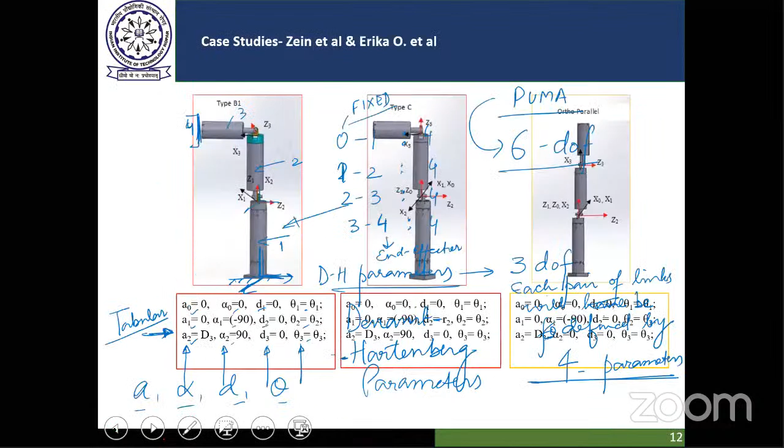Anyway, wherever I see a clean location, okay, this. So here, as I said, the first step is to affix the frames. First step is just to take long lines in the Z directions. Okay, this is the Z's, this is my Z's, this is my X's, this is my X's, long lines.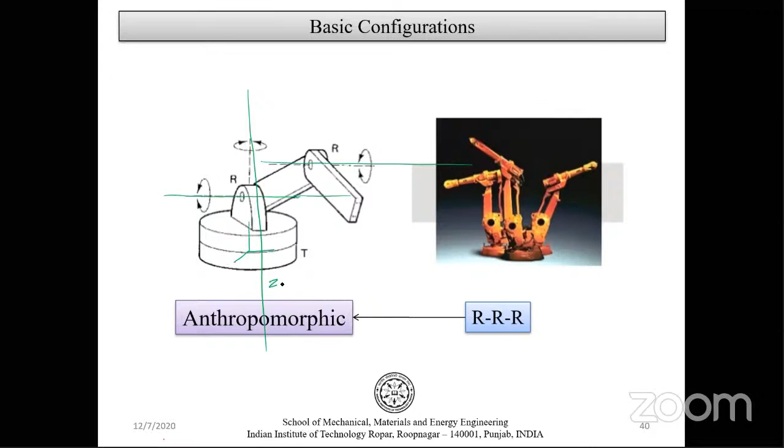Second is the common perpendicular. So I'll take a reference frame, I'll say this is my RRR. Okay, so this is my first, Z1, this is Z2, and this is Z3, and Z0 I'm also taking in the same direction as Z1, right? This is straight. Okay, so where will be my frame?

The frame is from Z1 to Z2. This is my Z1, this is Z2. So of course the two are intersecting, so this is the common perpendicular, so X can be any direction, X1. Now Z2 and this is Z3, the two are parallel, so I can take...

So this is my Z1. This is the first frame: Z1, X1, and Y1 is of course from the right hand rule.

Then Z2 and Z3 are parallel. You can take the frame anywhere, but you'd like this to match Z2. If this is the first axis, this is the second, and the perpendicular is there, you can take the frame anywhere on it—so you may like to take it exactly at the joint. That gives you the third frame, with a virtual Z4 there. You can take it anywhere, so you may like this to be your Z3 and this your X.

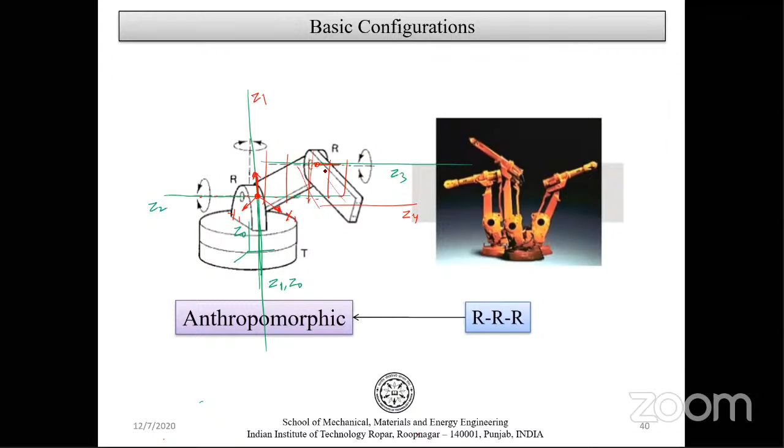So my point is, once you know the method and the convention, it becomes just a procedure. The idea is not to know the procedure—the idea is to know why we are using the procedure.

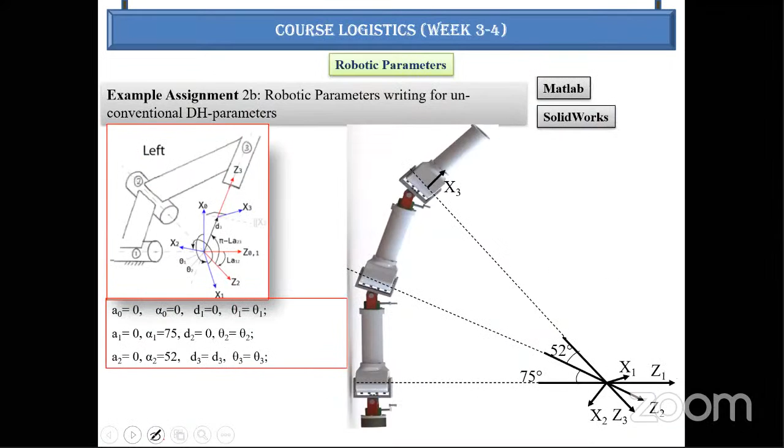So you will affix the frames. Once you know the frames, it's very straightforward to write the four parameters, which is the last point for today. The first parameter is your twist angle, denoted as alpha. The twist is the angle between Zi minus 1 and Zi, about Xi minus 1. Going from Zi minus 1 to Zi, very straightforward, you can write it.

So that means if I take the two parallel—this is Zi minus 1, and Zi's parallel link here—this is the angle from Zi minus 1 to Zi about Xi minus 1. This is my alpha I minus 1. What it has done is, if you rotate about X, Zi minus 1 will become Zi—they become parallel.

Okay, what is the second? This twist angle is your first parameter. The second is this distance, which we call the link length, normally denoted as A.

It is along Xi minus 1—that distance, the distance of the common perpendicular, is your AI minus 1. The index is important, going from Zi minus 1 to Zi.

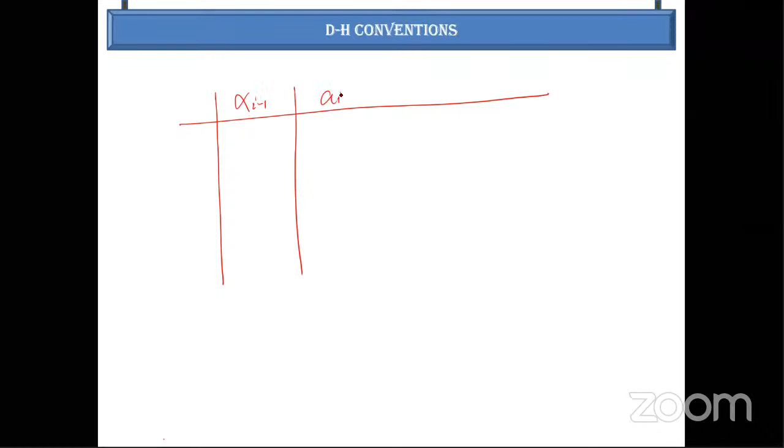So it's a very defined exercise which helps us find these four parameters. The moment you get alpha I minus 1, a I minus 1, dI, theta I for any I, you can write it for 3 degrees of freedom or 6 degrees of freedom.

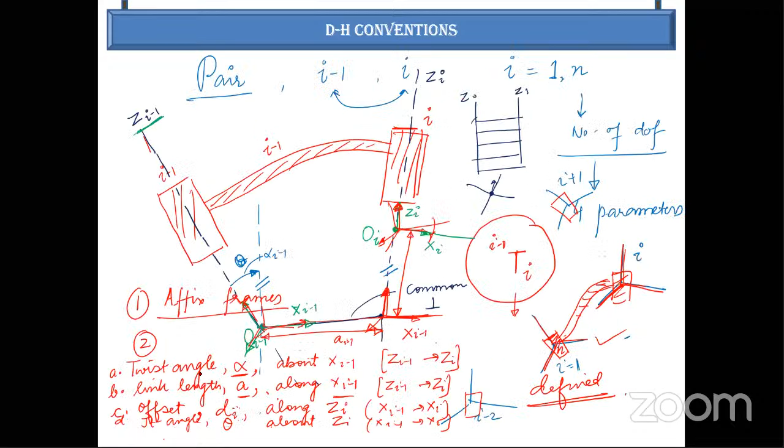From 0 to 1, what we were writing—if I is 1, depends on how many degrees. Say if we have only 3 degrees of freedom, the first will be alpha naught: the angle between Z naught and Z1 about X naught. This is just using the previous exercise's definition, and if you apply it to your mechanism, you'll be able to write this parameter.

After that, from each set of parameters you get a transformation matrix: from the first, T1 to T0; from the second four parameters, T2 to T1; third, T3 to T2; and fourth likewise. In totality, if you know homogeneous transformations—even if you don't, you need to study it.

I just showed you how the rotation matrix helps us both as orientation as well as an operator. Similarly, the transformation matrix gives both orientation of the frame and its position. So if you now take 4 with respect to 3, pre-multiply with 3 with respect to 2, and so on to 0, if you pre-multiply these four, you will get frame 4 with respect to 0.

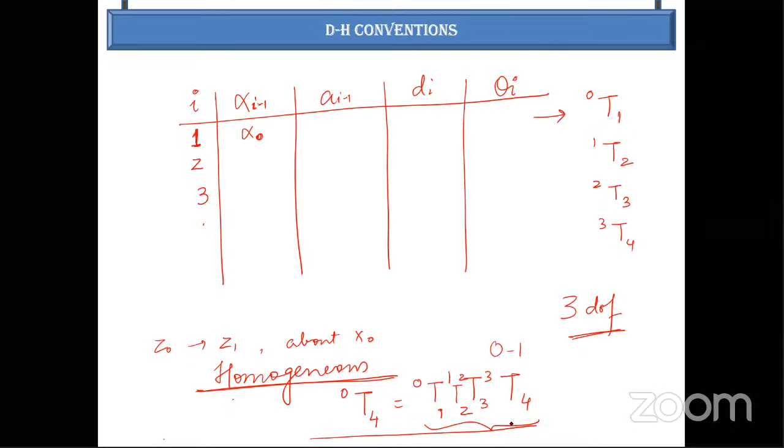And how these transformation matrices will be written is very straightforward. Once you know a(i-1), alpha(i-1), d(i) and theta(i), there is a fixed matrix in the book, which I'm not writing because this is book stuff. You have cos theta i, minus sin theta i, 0 and a(i-1). Then here you have d(i), minus sin alpha(i-1), and here plus sin. Similarly you have other terms, for example sin theta i cos alpha(i-1). Similarly, you have other fixed terms.

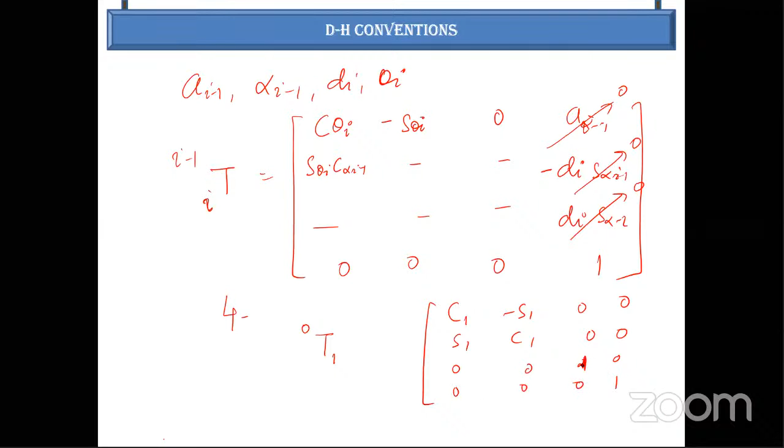So if you know this, for any four parameters you will be able to write, say, T1 to 0. Normally in T1 to 0, alphas are 0. If alpha is 0, this part will be 0, this part will be 0, a is 0. All these become 0, and you get cos theta 1, minus sin theta 1, 0, 0, sin theta 1, cos theta 1, 0, 0. In fact, you get exactly this matrix. It's very straightforward. In totality, you get your model.

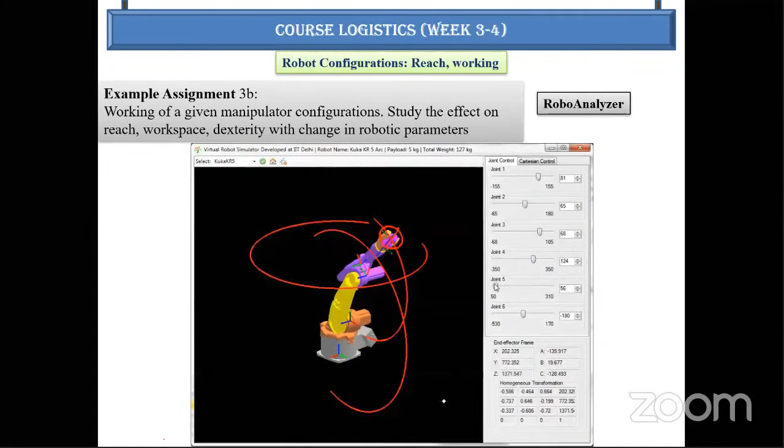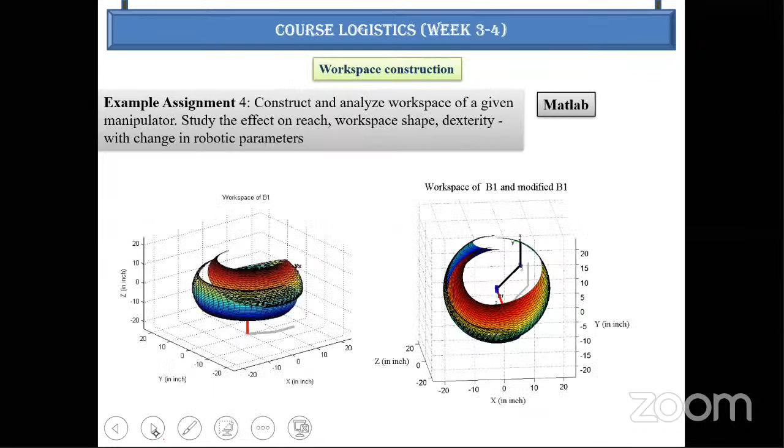I would like to complete by introducing something you can practice. I always try to uplift Indian versions, and RoboAnalyzer is software developed by IIT Delhi by Professor Saha. But I feel fundamentals first, then using it is better. See how you change the joints; at the back, the same equations I showed you are used. You can see the lengths and everything, and just by changing theta 1, 2, 3, or 4, you can see the entire workspace, developed using the same models like in MATLAB.

You can practice. This was just to introduce you to robotics, as she mentioned in the beginning. Kinematics takes more time, but it is all about the relation between the last and the first, that is, the end effector and the base. So if you know the frames of fixation, you know everything. With this, I would like to close and thank you very much for your patience.